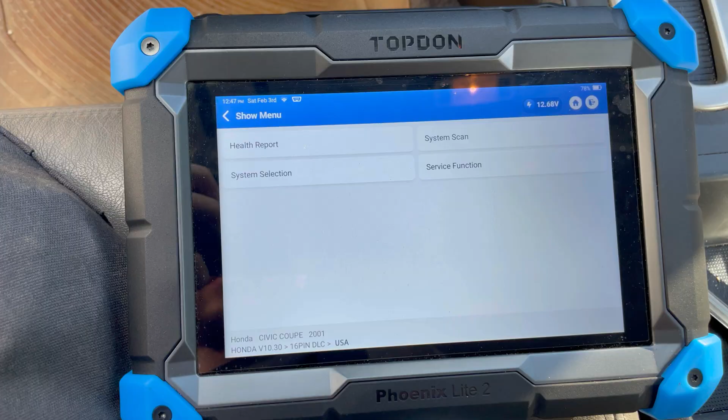I'm using Topdon Phoenix Lite 2 today. I purchased this a few months ago and I've been playing around with it and I seem to like it a lot. I really like this tool. I bought it with the LabScope kit. Really love it. It is what it is. You know, it's not like the biggest screen or whatever. It doesn't have the topology like everyone raves about, but what do you need topology for? I don't need it.

Anyways, we'll let this query all the modules. I think it takes about 2 minutes on this slow Honda, and we'll see what we've got. We've got our 3 codes. I already knew about that because I've already looked at this, but I'll show you what we had for codes.

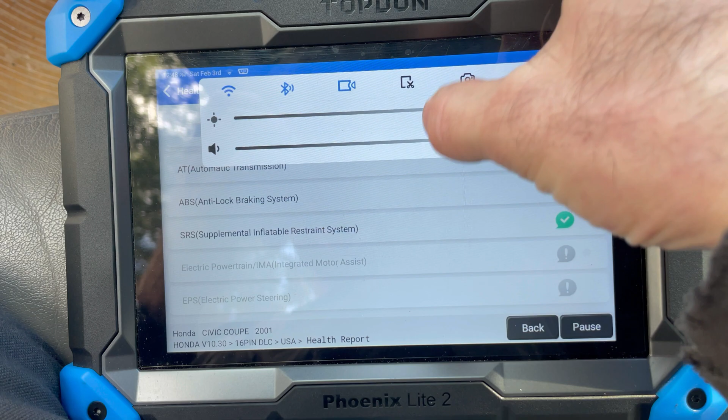Another thing is that this tool has screen recording, which I may start incorporating into my videos. Yeah, I could just do a screen recording. But that sounds like some extra work for me and not a whole lot of, what did we gain from it? You can still see the screen. So yeah, it's taking a little bit of time, but it's scanning for a lot of modules that this old 2001 vehicle will not have. But that just kind of shows you what kind of capabilities you have on this tool, that it will communicate with all these different systems.

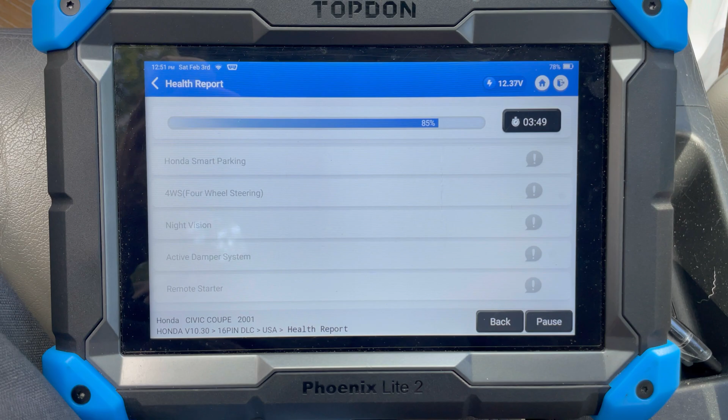And I'll show you, because I have my other tool, the King Bolen. I have this one that the stranger from the internet sent me for free, and I've been comparing. And I'll show you a couple of the differences between these two tools, even though they are pretty similar in software. They basically use the same software.

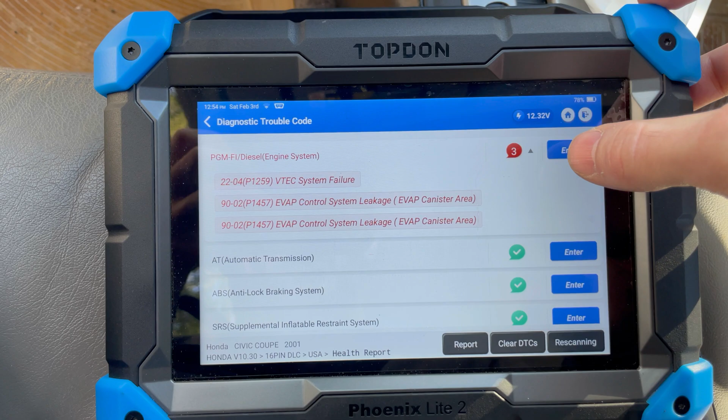So this is what I ended up with for codes. We've got a VTEC system failure code and the P1457 EVAP leakage code, canister area. I already did some testing on the VTEC system. I will do it again because I told the customer, hey, I couldn't duplicate the VTEC fault. So we will go for another road test and maybe I'll try out that screen recording thing, right? And we will test the VTEC system, and I'll show you how I test the VTEC system.

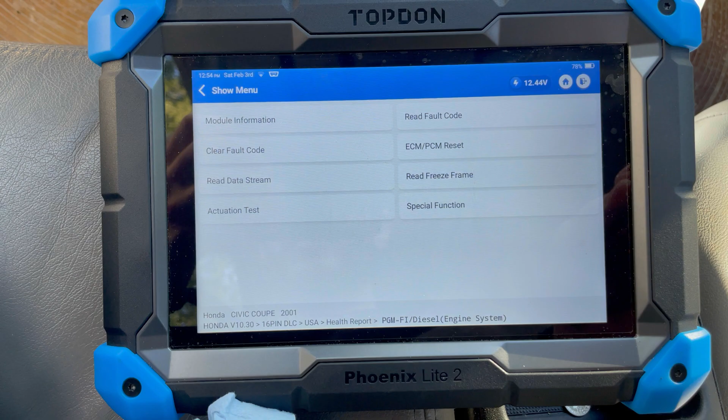I don't think that there's really anything further that I can do with the scan tool because the scan tool will let me operate the 3 EVAP valves, but it won't let me do it with the engine running, because what I wanted was the engine to be running so I could operate the purge valve and test the vacuum coming out of it. So let me go under the hood and I'll show you how I ended up where I ended up.

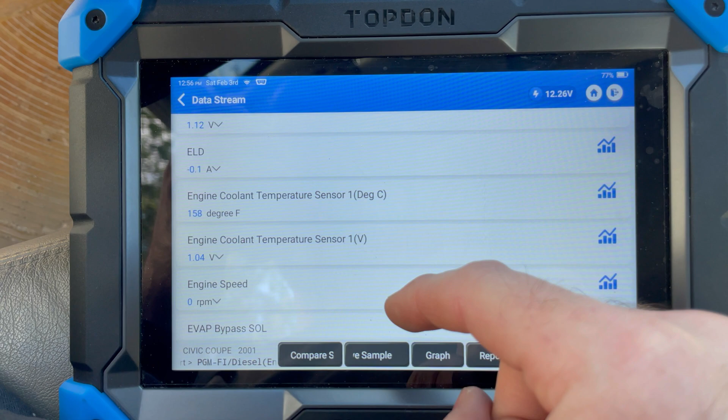So the first thing that I do when I am testing an EVAP system is I will look at the fuel tank pressure sensor as well as other pressure sensors on the vehicle to verify that I can actually trust them, because the fuel tank pressure sensor is a huge part of the EVAP system. If that sensor is not reading correctly, well, your EVAP system tests are all going to be wrong.

0.23 psi, I'm okay with that because 0.2 psi is not very much. But what I think I'll do is I'll open up the gas cap and make sure that that goes a little bit closer to 0. I already did all this, so I'm already happy with the fuel tank pressure sensor operation. Again, what I found was that during the EVAP system self-test, because I can command a self-test with this tool, it takes a little while and it doesn't really do much for me. Where is it? Special function or actuation test.

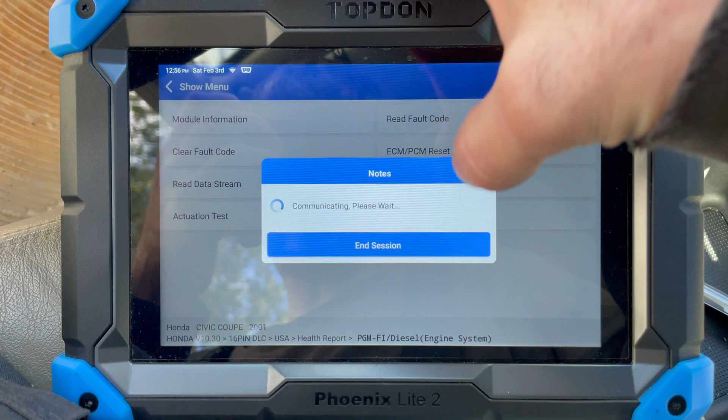Anyways, so during this test, I noticed that the fuel. So that just shows you what this tool can do. And I'll show you the King Bolen, the difference, because this is a fully functional professional grade tool. This has bidirectional controls. I can send commands out to the car with this tool.

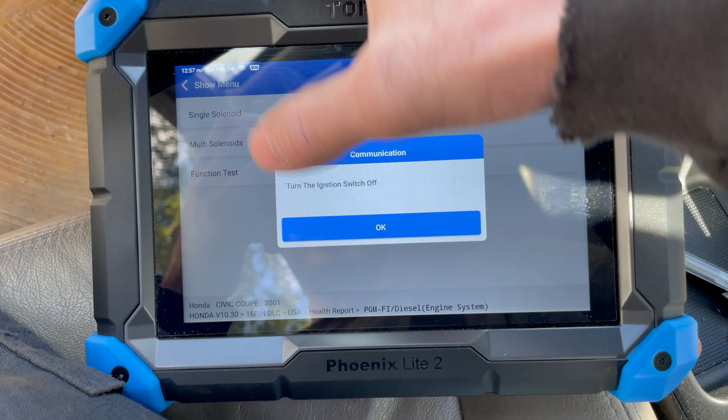Function test. Yep. Ignition off. Good old Honda beep. Start the engine.

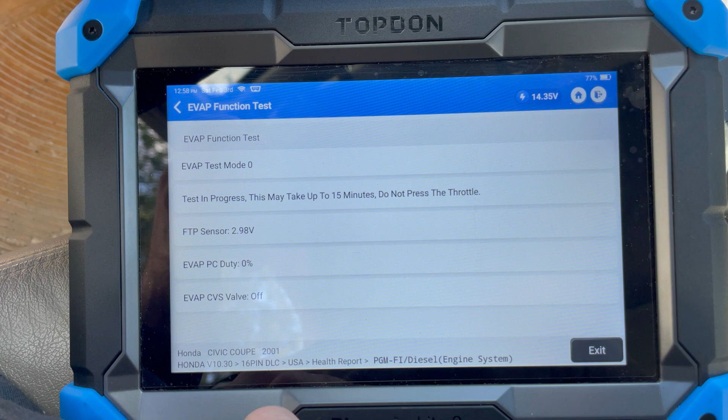So anyways, I went into this EVAP system test. I let it run and complete. And then, so we've got our fuel tank pressure sensor voltage. It does not show us pressure anymore. I can't remember where I looked it up, but it tells me the fuel tank pressure sensor voltage value, which is normal. But the important part is when we see these valves get commanded on and off, and we see the purge come up.

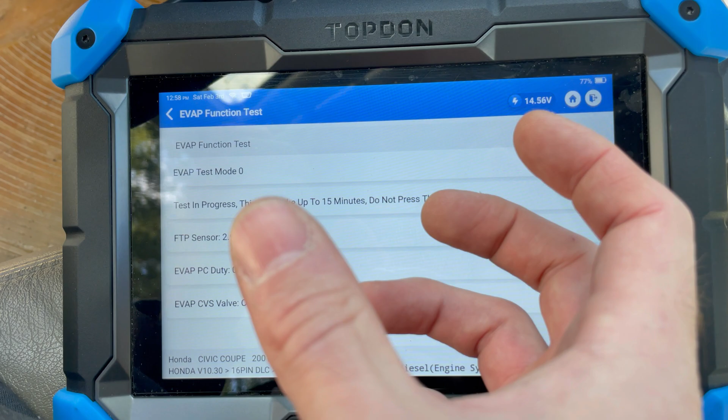So let's say the vent valve, canister vent shut solenoid is on, meaning the valve is shut and sealed, and the purge solenoid starts coming up. So we've essentially closed off the system and started to pull a vacuum. When you see these two values move, you should see the fuel tank pressure sensor do something. I don't care what the value is, if it's good or bad. When we are drawing a vacuum or pressure of any sort on that fuel tank, that sensor should move.

Okay, so that's where I decided I need to look at that purge valve, because I saw that the fuel tank pressure sensor just sits there and does nothing. Doesn't matter what happens, nothing moves. So of course it sets the EVAP code, because it's not pulling any vacuum on the system, and the computer can see that.

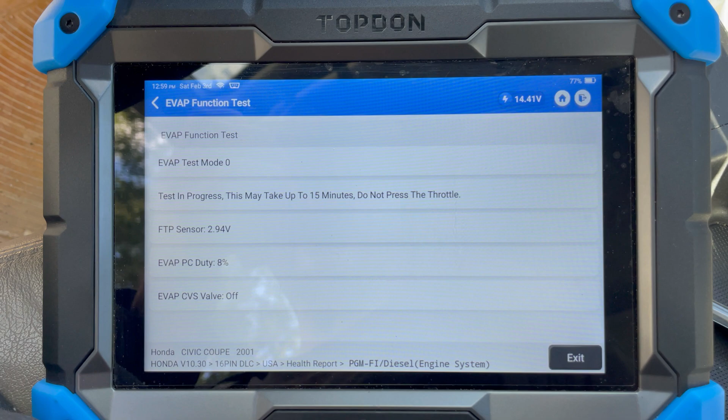So this EVAP self-test will actually run for another probably 5 or 10 minutes, and then it's going to pop up. It'll say rev up the engine to 3,800 RPM for 10 minutes or something crazy like that. I've already gone through all this process, and I've determined it's that purge valve. You're not seeing anything really change. Even though the vent's not closed yet, you should see something happening.

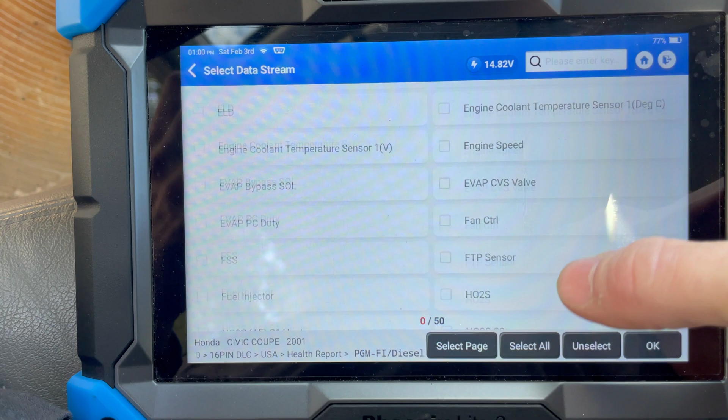Anyways, let's go under the hood. I'll show you how I further confirmed that I needed to look at that purge valve. So we'll go back to data, EVAP purge control duty cycle. So we're going to verify that the computer is actually commanding it to do something before we go check it, right? So now let's go under the hood with this tool.

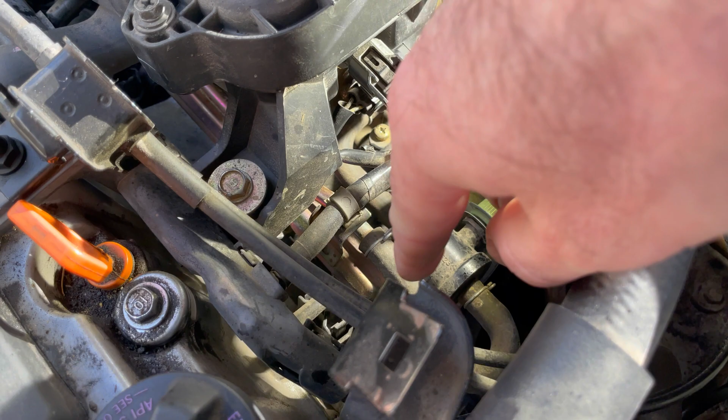Okay, so here we are under the hood. We still see that the purge control is at least commanded to do something. The purge solenoid is that guy right there. So this hose right there goes to the engine. That's where your vacuum source is. When the valve opens and closes, it applies vacuum on this hose. There's your EVAP test port.

It applies vacuum on this hose, which runs through this pipe to the other side, and it runs to this vapor line right here. So this vapor line goes to your fuel tank, and that's your EVAP system. So from here back to the purge valve, you should have a vacuum. Whenever this guy's commanded to almost 30% duty cycle right now, we should have a vacuum. So when I disconnect this hose, nothing, no vacuum. So that tells me right away my problem, or at least my starting point, is to diagnose the EVAP purge solenoid.

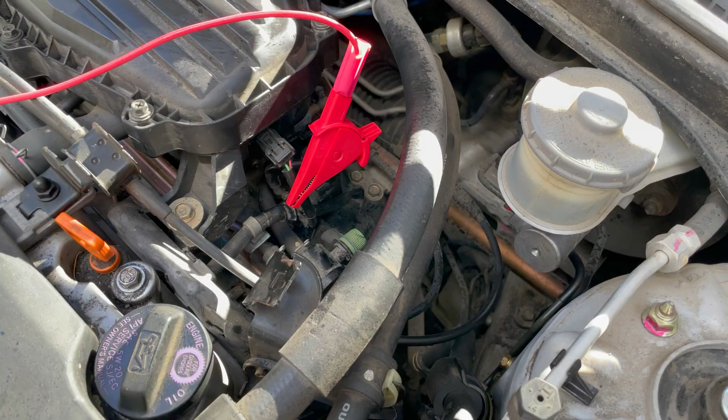So I took the purge control solenoid and I took the two screws out. I back probed on the, I can't remember which color wire it is, blue and yellow I think. That's the ground from the ECM to ground that solenoid and actually operate it. And I've got this running over to the scope here. Nothing's going on at the moment. We're sitting here high at battery voltage essentially, and what you're seeing there is voltage spikes from the ignition coils, so ignore those.

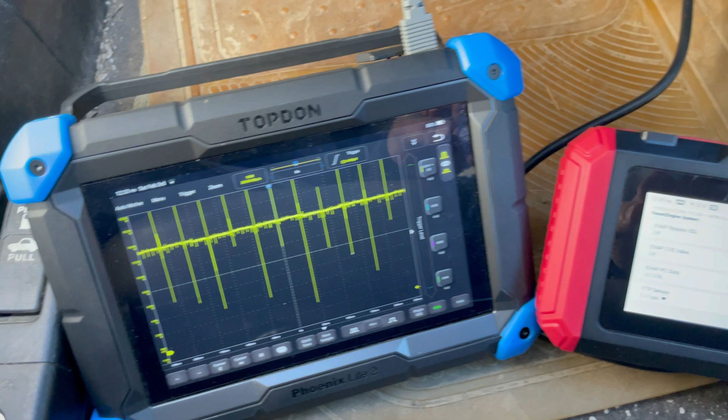Let's go look at the scan tool and see what our actual duty cycle is being commanded to, and let's see if this actually looks correct or not. All right, I brought everything in the car with me so we could see. Again, those voltage spikes are just from the ignition coils. On the King Bolen, I've got an EVAP purge control solenoid duty cycle of almost 30%, which we are not seeing here. We should see a 30% duty cycle ground signal. It should be pulling all the way down here.

This is 0 volts, so this is your ground down here. That tells us that these voltage spikes are not what we're looking for. We should see a nice square wave all the way to ground, all the way back to battery voltage in a 30% duty cycle. So do you know what that tells me? It means we probably have some sort of broken wire between the purge valve and the engine control module.

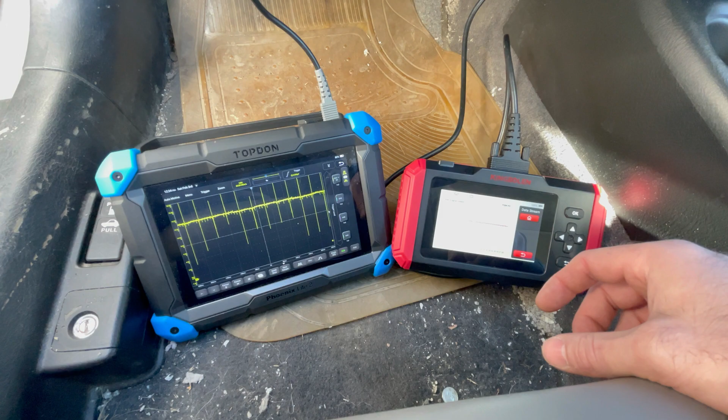So I think I'm going to look up where's the engine control module. If I remember correctly, on these Hondas, it's underneath the passenger seat there. So I may have to open up, pull the carpet back and get a pinout and figure out which terminals that we're looking for, and we'll do a continuity test to make sure that that is what is going on. I could explain on the wiring schematic how I'm hooked up and make that make a little more sense for you too.

So here on the wiring schematic, we've got the ECM here, we've got our fused power up here, we've got our purge solenoid right there. Okay, so on the black and yellow, anytime the key is on or in start, we should have power at all times, okay? And on this wire, the ECM will pulse ground. It'll duty cycle ground to either control that valve a little bit open or all the way open, right? It's gonna flow more or not, okay? So I have my probe connected on pin 2 directly at the EVAP purge valve.

So if let's say that this wire is not being grounded, you could just imagine that as the valve is closed so the water does not flow through the pipes. But since the valve is closed down here, any voltage or pressure will be, you'll have that potential all the way up to the point that it is open, or that open circuit, I mean. If we were talking in water terminology, water and pipes and valves and stuff, you would have a little valve there. You'd essentially have pressure all the way up to this point.

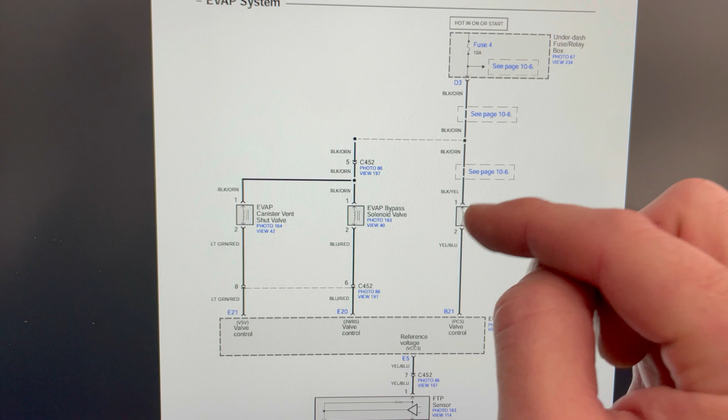So I plugged in right at that point right there, and I do have a full 12 volts. So that proves that this fuse is okay, this wiring is okay, and I'm getting at least power up to and through that solenoid. So the solenoid's probably okay also. But we are not seeing any ground signal from the ECM. So I need to access the ECM. I'll access this connector here, and I will test from here to here and verify whether this wire is our problem or not. So I think that this wire is probably open somewhere, broken wire, crusty wire, whatever we're gonna find.

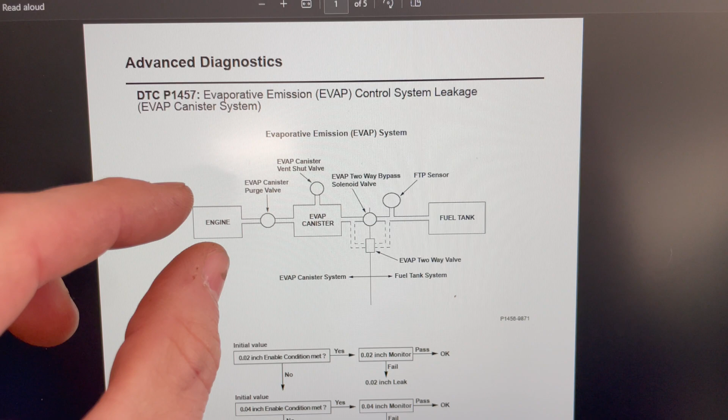Here's a quick diagram of the system related to that P1457 code. We've got our engine, which would be our manifold vacuum source. That's the source of vacuum to suck the fuel vapors rather than liquid fuel, because we're just trying to control the vapors, evaporative emissions, right? So that's sort of our vacuum source. The purge valve is our valve that can turn on or off, or a purge duty cycle anywhere from 0 to 100%. So that controls how much vacuum is going to be placed on the EVAP system and how much vapor we're pulling in.

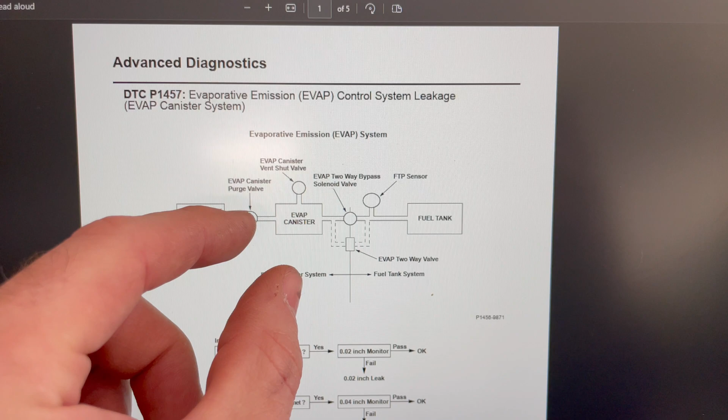The canister vent valve, this should be normally open at all times, and the only time that we close that valve is when we are trying to do a leak test of the system. So when the computer decides it wants to do a self-test on the system, it will close that vent valve, which will essentially cause the entire fuel tank and system to be a closed container. We're gonna pull a vacuum on it with this valve, a controlled amount, fuel tank pressure sensor right here to measure how much vacuum we've actually pulled. And the result is gonna be whether it holds the vacuum or it doesn't. So it's gonna tell you, well, just how fast did the vacuum leak down? Was it a small leak or a large leak?

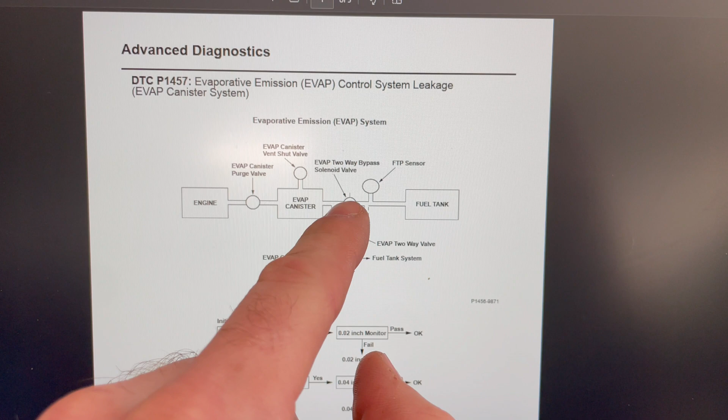So what we're chasing here is a P1457, which means we've got a leak on the canister side of the system. We've got the two-way bypass valve also. That's a little something that Honda does so that they can really fine tune on where is that leak, right? Because what they're doing is that they're changing the state of that valve, the two-way valve, to either leak test the canister side or the fuel tank side, and they can get a better idea of where exactly the leak is.

It's not really that, you know, I wouldn't say it's needed that much. Standard EVAP diagnostics without that little valve, you can basically test the entire system the same way. This is just a little bonus that Honda is doing.

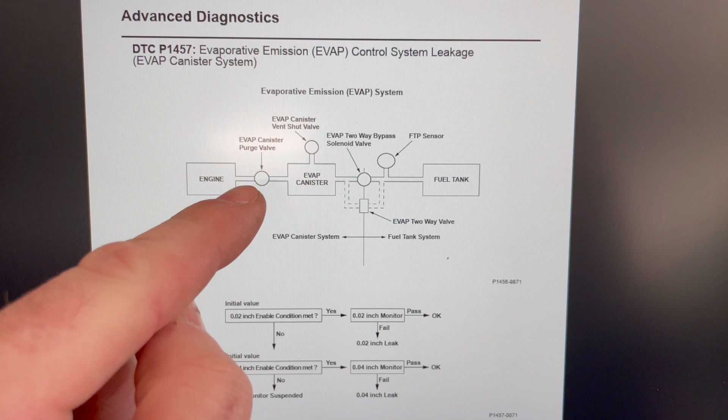So what we have going on here is that the purge valve is showing duty cycle. It's showing that it's commanded to about 30% or 40% at some times, and I have zero vacuum. I have no vacuum getting out of that purge valve to the rest of the system. Therefore, the ECM flags that as a large leak. It says this system is leaking so bad we can't even build vacuum.

But the ECM doesn't know that the purge valve is simply failing to send any vacuum to the system at all. And our testing has revealed that we probably have some sort of electrical fault with the purge valve circuits. So let's continue.

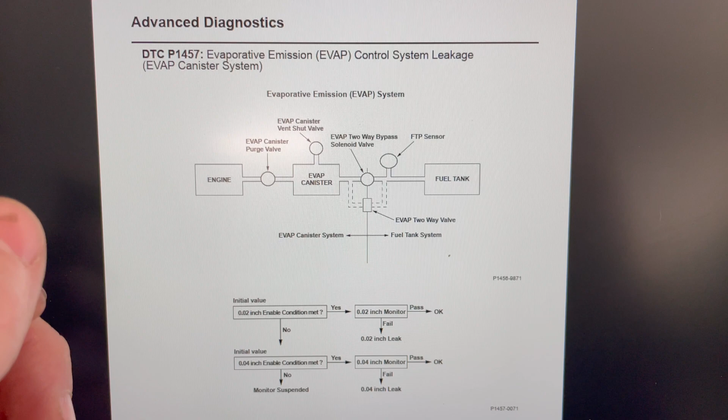So I took a little break and I did some research. Yeah, the PCM, the ECM is underneath the dash. It's not underneath the carpet, it doesn't look like. But I don't really want to crawl underneath the dash if I don't have to, so I decided, well, is there an easier way to just do a quick test?

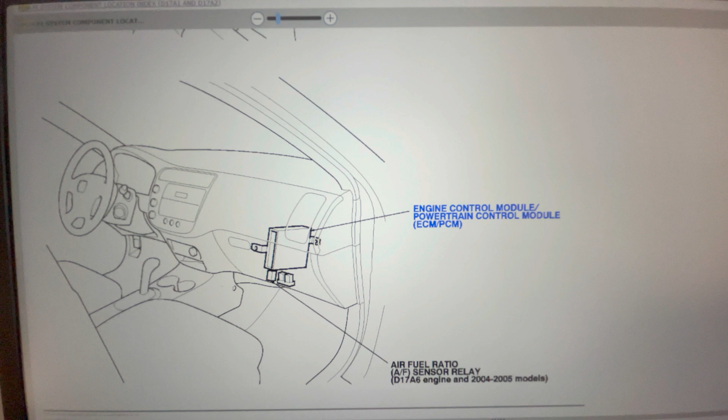And I decided maybe I should use the scan tool to command the purge valve on and use a test light just to see if it lights up and just verify that, yes, I do need to go under the dash. So back at the car, what does that look like? I'll grab this scanner.

There. The test light that I had wasn't working, and whenever I tried to touch the bulb and see why it wasn't working, well, the bulb crumbled to pieces, and that was that. So I did find this, and we're gonna see if this works. Got our valve here. We're gonna back probe on the correct wire, but I'm gonna disconnect the solenoid when I do it, and we're gonna see if that wiring will hold any load.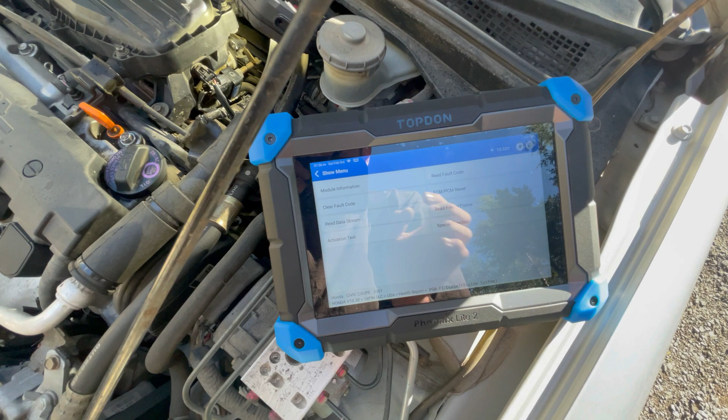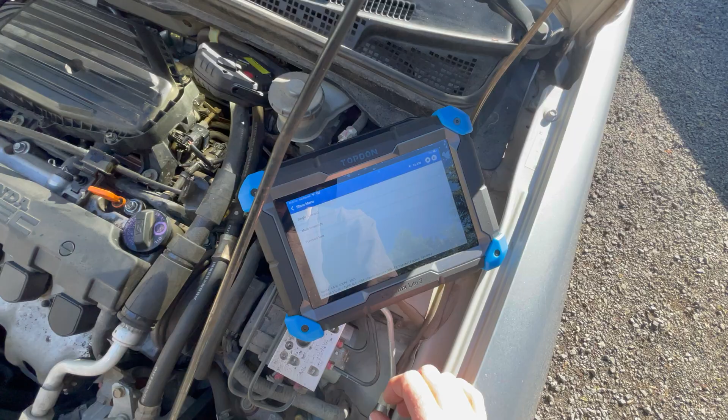So, nope, data, we don't want data. Activation. Single solenoid. Does not want the engine running. Function not supported. Okay, did I not turn the key on? Let's try that again. Like magic.

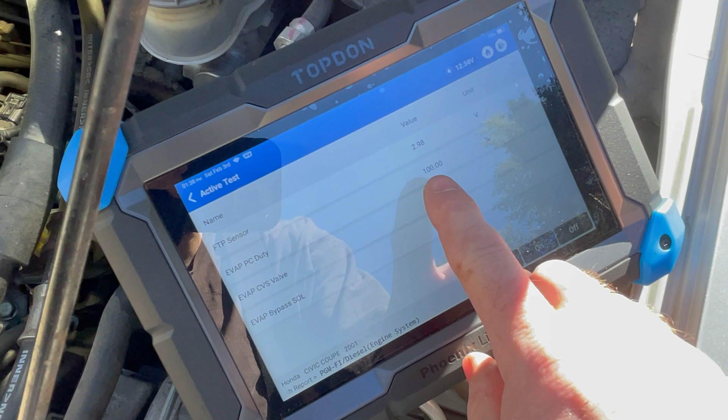Okay, so purge solenoid duty cycle 0%. It's commanded off. If I click on, it commands it to 100% duty cycle, so the test light should light bright at that point. So let's verify that we can trust our test light.

I don't think I have enough hands for this because this little piece of crap light that I found doesn't have alligator clips on it. I'll do what I can. Look at that, at least one of them's working. Okay, so we are testing for a ground. Stick this over here, and I'll go get whatever back probe I was using earlier. Okay, so I've got my stuff rigged up here. No joke.

On, let's say 100% duty cycle. I'm using a T-pin. I'm not actually at the shop today. Look at that, it's not lighting. That should be lighting up right now with a ground. We've got no ground to the purge valve.

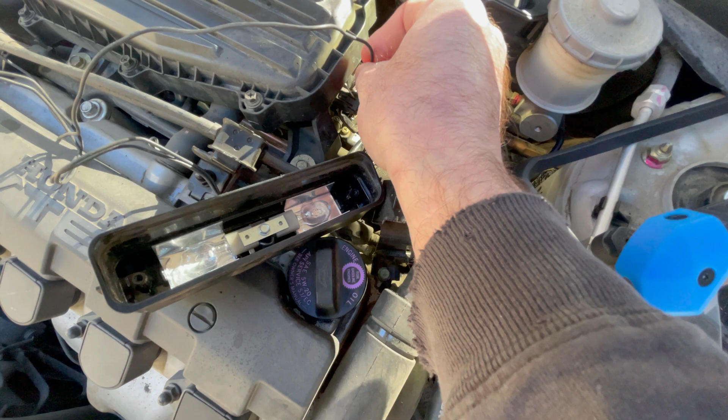That verifies, look, it's commanded to 100%. Not lighting the light, yet the light works. So that verifies that we need to go under the dash and check the wiring between the purge valve and the ECM.

Okay, so after lowering the glove box, I can see the ECM up in there now. Just need to figure out which connector it is and which terminal. Look at that. We've got some sort of aftermarket wiring hacked in. Could that be related? Did somebody hack some wiring? Did they cut a wire somewhere that they shouldn't have? Or what? What's going on here? Okay.

Anyways, we're going to test the continuity of the wire and verify whether the wire is open or not. If the wiring is okay, then we can assume that the ECM may be having a problem grounding the purge valve, so the ECM may be faulty.

Okay, back on the schematic, apparently B21. Does that mean connector B, terminal 21? Does that mean row B21? We don't know. Might have to find some more information there on the pinout view. These links never work, so I have to search them out and find them. Stand by.

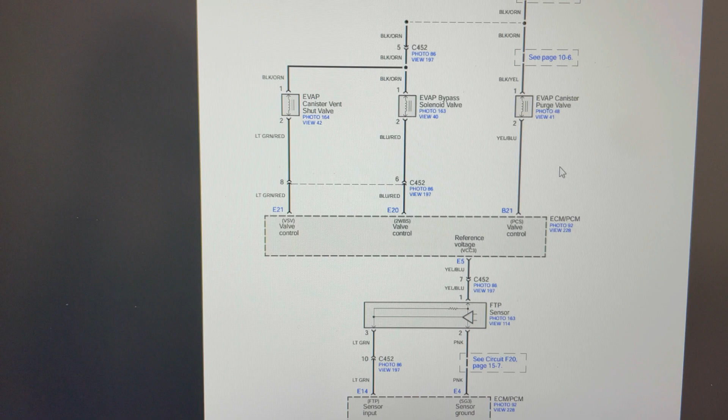Look at this, found this buried deep within. They've got terminal 21, connector B. It even gives you a descriptor of what you should see. Further down, there was even a picture of all of the ECM connectors somewhere. Okay, there it is right there.

This is the pinout for the ECM, A, B, C, and E. So we are after the connector B, 24 pin, and we're after terminal 21 to do that continuity test on the wiring.

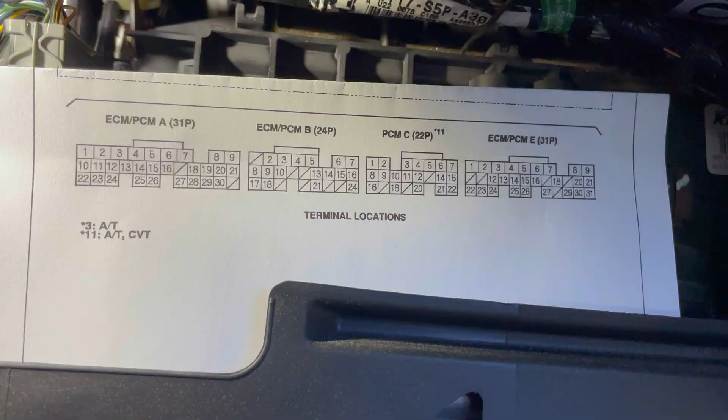I've got my guides printed out here. I've got my pictures of my ECM connectors. I've got my wiring schematic. Now I can go back under the dash and continue testing. So if I go by this picture here, I've got a 31 pin and a 31 pin on each end. The one we are after is a 24 pin, and we've also got a 22 pin. So we're gonna have the larger of the two in the middle.

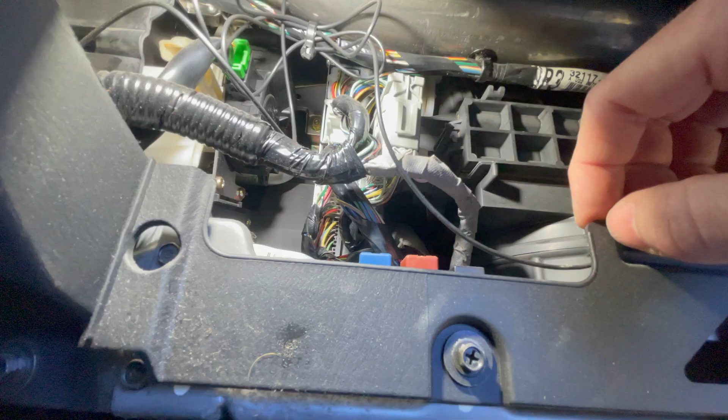Where does that translate to the car? That black one looks like the small one, so it's that white connector. I'm not going to disconnect it if I can help it. I'm going to back probe it because I don't really want to start disconnecting things. I don't want to disconnect the radio, deal with stuff like that if I don't have to. We're going to back probe that and do a continuity test on the wiring. So let me see if I can kind of get this stuff out of the way.

Where's my little schematic? Terminal 21 is at the bottom of the connector all by itself. See that? There's a blank terminal, two blank terminals, and one on the end. We are after what? A yellow and blue wire all by itself on that white connector. So, zoom in. I can see better in the camera than I can see just by my eyes. It's right there. Is it? Is that it? That yellow and blue one.

Right there. Can't get in there. I've got to get back probed on that one. And then we're going to do a continuity test to the purge valve. See if we can verify our wiring fault and then what to do about it.

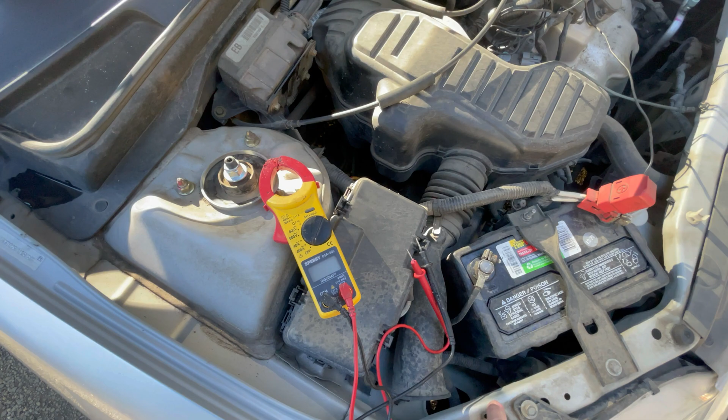So I'm going to be using this meter today. It's more of a household electrician's meter. Of course the battery's dead. Gotta go find a battery, and the dog's chewed on it. Isn't that nice? I don't have my Fluke meter with me today, so I'm gonna be using this for the continuity test. I've compared it to the Fluke and I trust it, so we're good there. I just need to go find some batteries. I don't think the leads are long enough on this to reach all the way, maybe, but we'll see. I'm using the back of my truck as a workbench today. Just went and robbed some batteries out of somebody's remote. I'm gonna throw these back on the meter and continue on.

And if you keep hearing airplanes, it's because there's at least one, I think 2 or 3 of them flying around doing aerobatics right now.

Okay, so back at it. Always verify that your tools are working properly. Yep, the continuity tester is working okay. Let me set us up on the purge solenoid over here and the ECM in there. I may need a jumper lead to reach all the way.

Let me see if I can catch these airplanes on video, maybe. We'll see. Yep, there it is. They were doing loops and flips and all sorts of stuff.

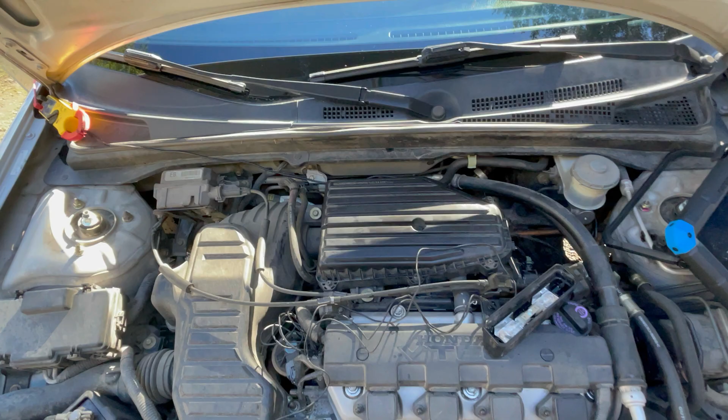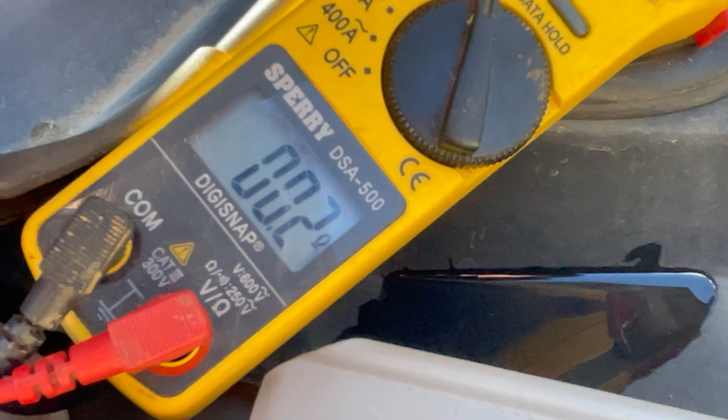Okay, so I've got the black lead connected to the yellow and blue wire on the purge solenoid connector, and I've got it stretched over here with the meter sitting here, and the cord reaches in there. What this means is that I don't need to rig up some test leads with alligator clips to reach all the way. We'll just listen for the beep, right? I don't know, we may need to see the value. Well, look at that. 0.2 ohms of resistance. So that wire is not broken. It's not open circuit. Could it be green and crusty and not making it all the way? Should we do a voltage drop test on it?

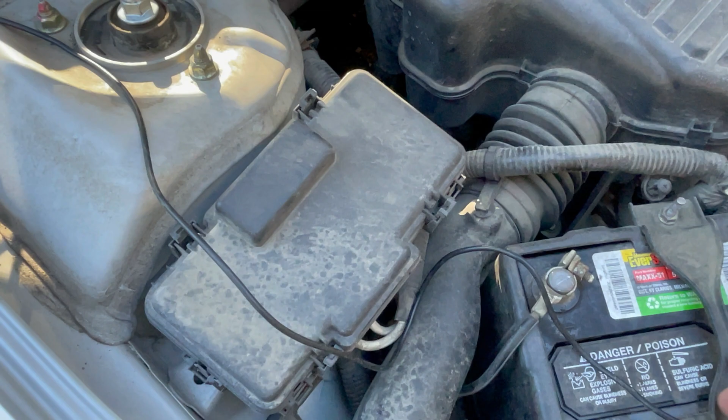Okay, so now look. I've got the red probe connected on the yellow and blue wire, terminal 21 of connector B. We're running it out here. I've got it connected to this lead. So I'm essentially taking the place of the ECM grounding the system right now. I've got my test light connected to the purge solenoid, the yellow and blue wire. So that's basically the other end. And we are going to simulate the ECM grounding that wire. So that tells us that the wiring is okay.

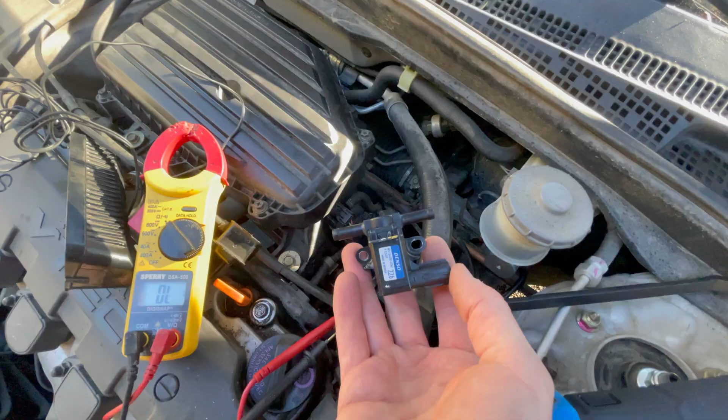Do we have a faulty ECM? How could it have failed? Could it be a bad purge solenoid killed the ECM? That's probably the only way that that could happen, unless somebody was in here testing and they blew it up. You never know. So I removed the purge solenoid so I can do a resistance check on it, and we'll determine if it's shorted. If it's shorted, then we would know why the ECM driver had failed.

Man, I need to get a camera mount. But let me see if I can rig this in here.

See that? There's two of them. Told you. They're doing aerobatics. They do loops. Wherever they're doing it though, it's like right behind the trees, so I can't get a shot of it.

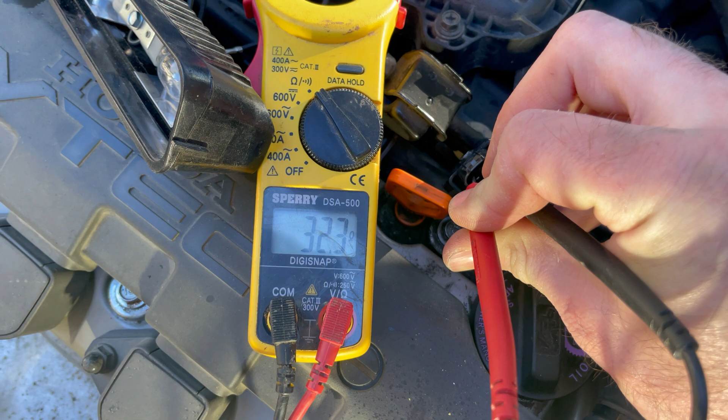So I just had it touching both terminals. There we go. About 33 ohms, 32 to 33 ohms. That is not shorted. That's not a shorted solenoid. That would not blow out the driver in the ECM. Of course, if this was supposed to have a clamping diode inside of it that was bad, that could blow out the ECM. So this is kind of a hard sell.

It's looking like a faulty ECM. No doubt that's going to be expensive. Do I even have the equipment to replace and program a Honda ECM? I don't think I do, and if I do, I'll have to do the research and verify that. I would replace this and the ECM because I don't trust that this wouldn't blow it up, right? So I'll have to do my research on this.

So now that I've verified the wiring is okay, I can reassemble all this, put all this stuff back together, and go. I have to do some sit down time and see what it's going to take to replace this ECM and see what it's going to take to get it programmed and all that good stuff. But let's go take a break real quick. So I'm gonna take a quick breath of fresh air.

You hear all those frogs? Yeah, ambiance, ambient noise. That's why I don't have any music in my videos. Music's annoying. It covers up all the details. Covers up all the cool stuff you guys wanted to hear. Or maybe that's just me. Whatever. All right, we can get back to work now.

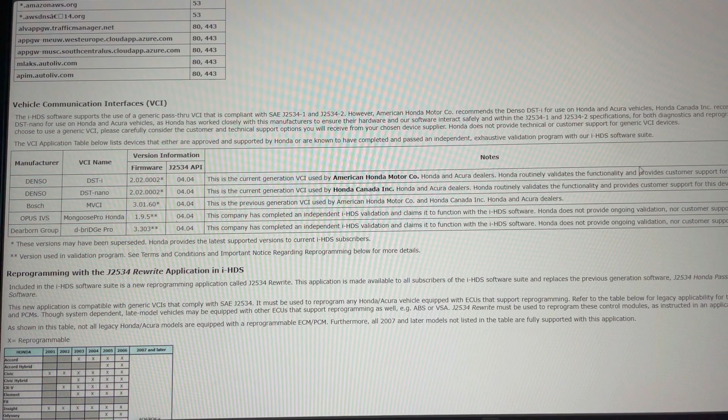Okay, back here in research mode. Honda programming, Honda J2534. Where did I see that? Vehicle communication interfaces. That is the list of approved devices that they know will work. The MongoosePro Honda, that may be an option to look into. I used to have access to a Bosch MVCI. Those work pretty okay. I don't have one anymore.

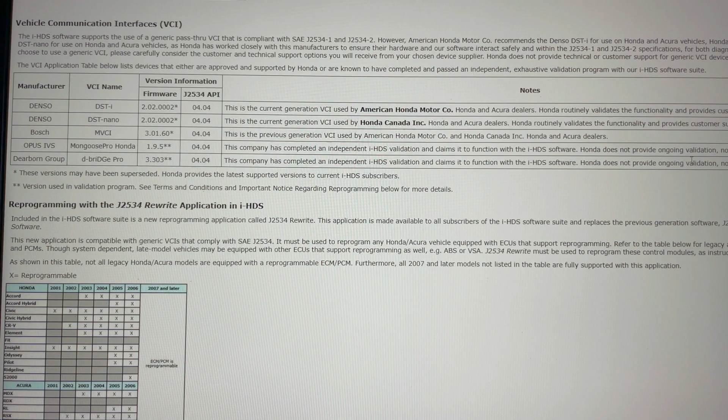So at the moment, I don't have the equipment to properly program this Honda if I were to replace the ECM. So I may have to send this customer back to the dealer, and I wonder what they're gonna say. They're gonna dispute what I had to say, I bet. That's just how it goes when you get two shops or two technicians whose diagnostics contradict. You never know.

There we have it, the Mongoose cable, about $500 plus, and I don't really do enough Hondas or Honda programming to really justify it, so I think I'm going to tell him to go back to the dealer and have them replace the ECM.

So back onto the VTEC thing, we had a VTEC performance code. That right there is the VTEC solenoid and the VTEC oil pressure sensor, or the switch. So when the solenoid turns on, it sends oil pressure to the camshaft and it alters the valve lift. And the pressure switch changes state to verify to the ECM that that has indeed happened.

So it's a verification check. When that code sets, basically, the ECM has commanded it on and the switch did not change state, or the switch is in the wrong state when it shouldn't be. So we're gonna go take a drive, or possibly, I think I did see in the scan tool menu it said VTEC test. Let's try that. Back here in the car, we do have a VTEC test.

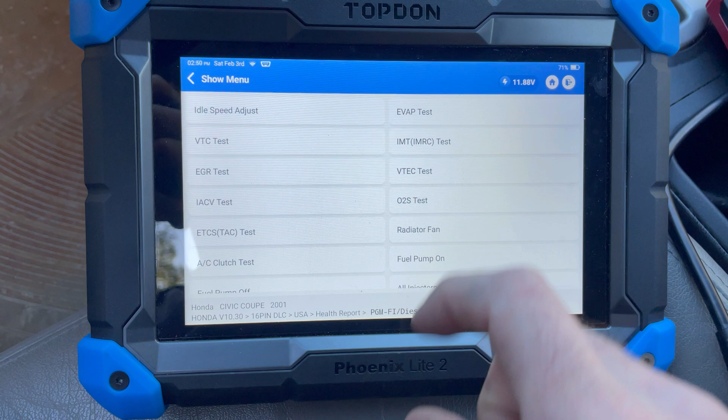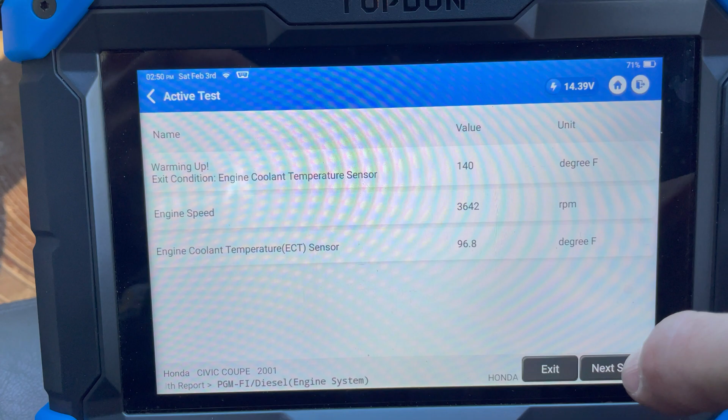Keep the engine speed above 3,000 RPM. Okay. We have to be at a minimum temperature of 140 degrees to run this test. Stand by. Okay, well, we reached that minimum and then it changed the screen on me. Okay, I have to click OK.

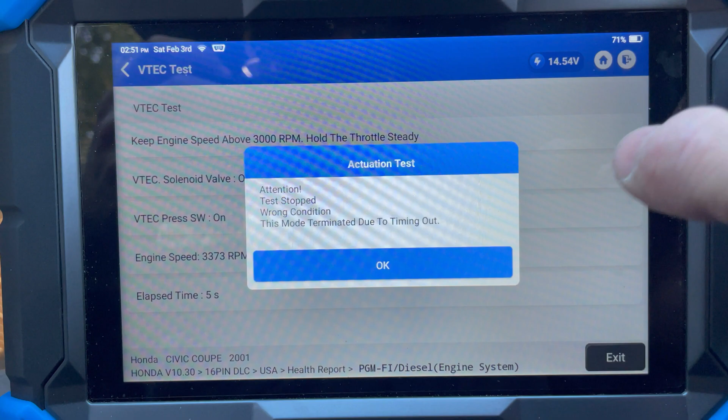No, technical difficulties. That's why I usually don't prefer to use an intrusive test like this, because you run into stuff like this and it just wastes your time. It told me to release the throttle, but I wonder if that was incorrect. Should I just lie and say I did? Elapsed time, now it's doing something.

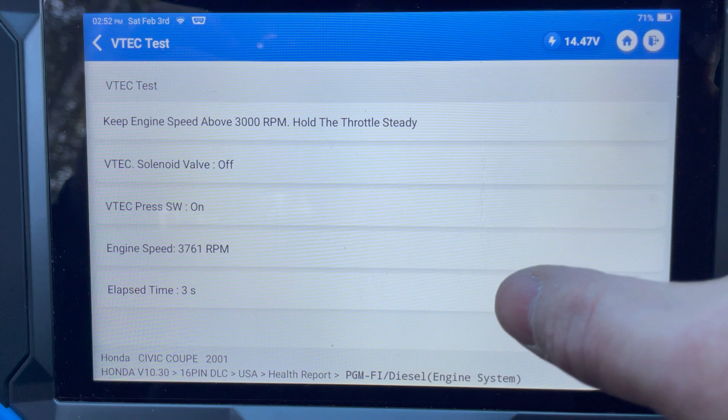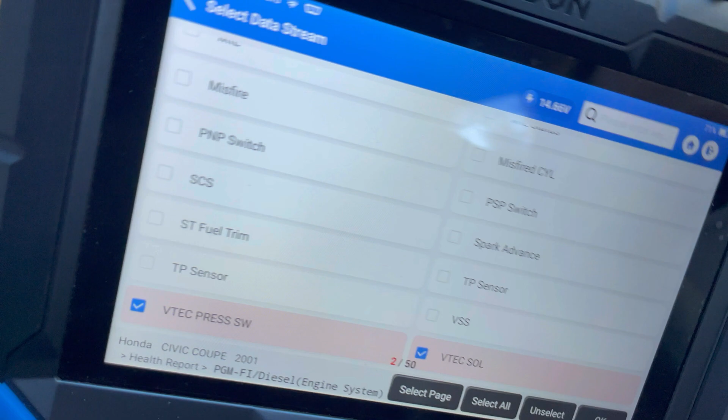I don't know if I trust this test at all. I don't. Let's go back. Read data stream. Whoops. Data stream. VTEC. Okay, VTEC solenoid, VTEC pressure switch. Let's hit OK. And graph. Okay, so, oh, we could even do a combine.

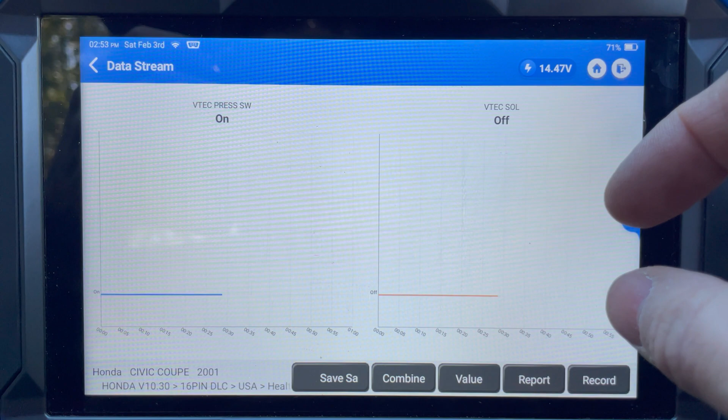So the VTEC system's only going to operate above 3,000 RPM, and apparently only when you're under load. So we are going to have to drive this to just test it in its natural state, letting the ECM make its commands on its own. And that's what I did before. Like I said in the beginning of this video, I did already look at this vehicle about a week ago when I had a little bit of time.

I took a look at it, drove it, and I said, well, the VTEC system isn't really having a problem right now. You would, of course, want to check the engine oil level first, and I did, and it was not at the minimum, but it also wasn't full, so it was kind of half full. And oil level can have an effect on your VTEC system, so you never know. It could just be low oil level, and that's it. So I'll have to move some cars around here, and we'll have to take this for a quick run.

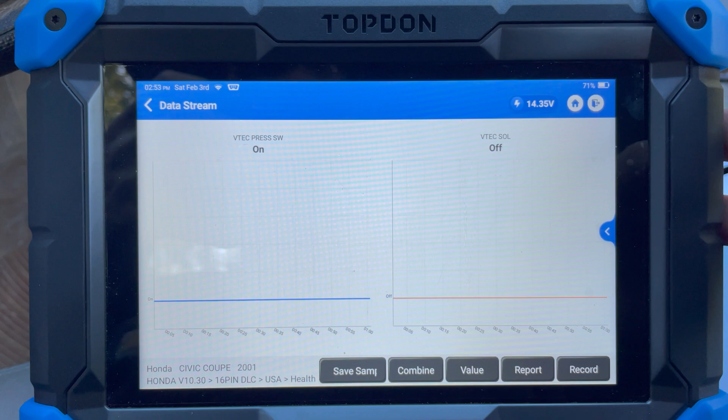So I've got Mrs. Dad's Garage driving right now. Let me see if I can try that screen recording feature. Starting recording. Okay, so this is normal driving right now. The VTEC system has not been activated. Step on it real quick, please. You see how that VTEC solenoid was commanded on, and then the VTEC pressure switch responded, and then when we turned off, again, the pressure switch responded.

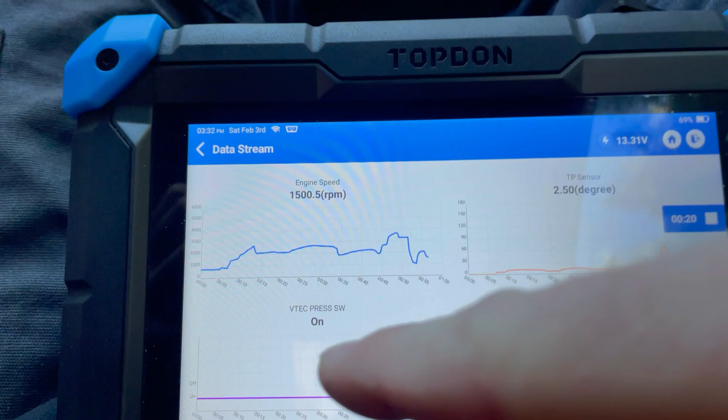Right now we're going down a hill, so we're not going to have any engine load. We're going to basically repeat this test. I'm going to have her step on it over and over again, and we're going to make sure that that pressure switch changes state every time that the VTEC solenoid activates. And then if we find any faults, great. But if not, then we'll do a combined graph and put the pressure switch on top of the solenoid so that we can check the timing. We can see if there's any sort of delay between the time that the solenoid turns on and the switch responds. So give us a minute, stand by.

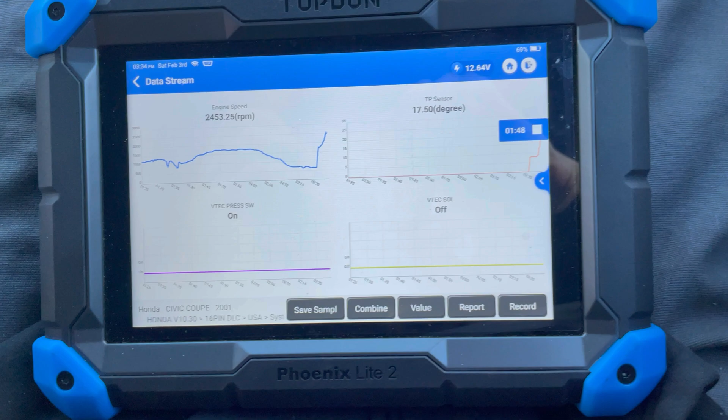Okay, so here we go again. VTEC system just activated. Let off the throttle, yep, deactivate. Get on it again. And this is what I experienced the first time that I looked at this car, is that the VTEC system was working perfectly every time. Do it a few more times. Let off. Do it again. Again, let off. See, it's changing state. We're coasting, no throttle. As you can see, I put the throttle angle on the screen.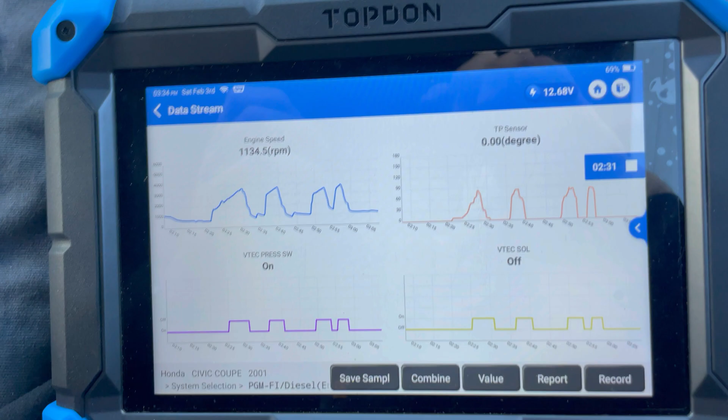Go ahead and hit it. Let off. Again. Let off. So, it looks like the VTEC system is still working okay. So I may just have to tell him that that's a code that we'll have to keep an eye on. We'll do a combined graph so that we can check the timing of everything.

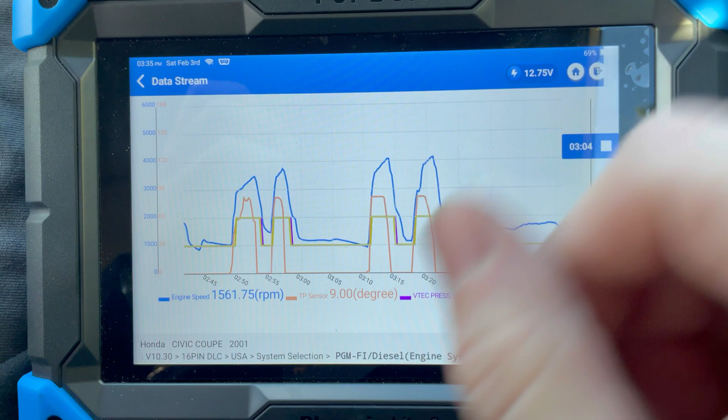Let me change this around so it's easier to see. So combine, can I just turn these ones off maybe? Yes. Okay, perfect. No, I wanted a combined graph. I wanted them on top of each other. Just those two. There we go. Okay, go ahead, hit it. So now what we're seeing, let off.

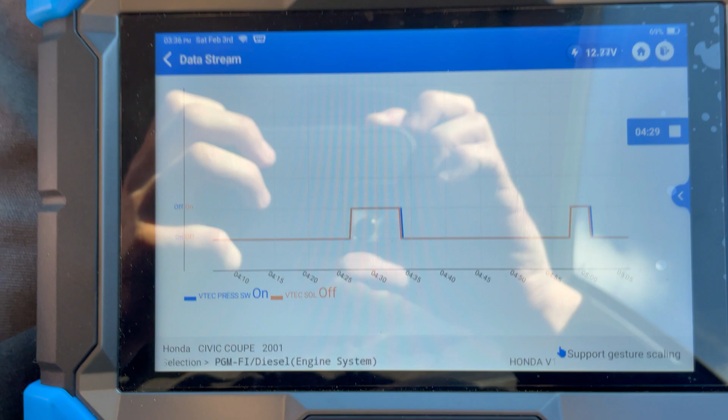The orange line is the VTEC solenoid and the blue line is the VTEC pressure switch. And it looks like the very moment that the solenoid turns on, the pressure switch is also changing state. And then again, when we release, there's a slight delay in the release, but it's almost instantaneous. Go ahead and hit it a few more times. Again, looking like the VTEC system is really working just fine. Okay, let off.

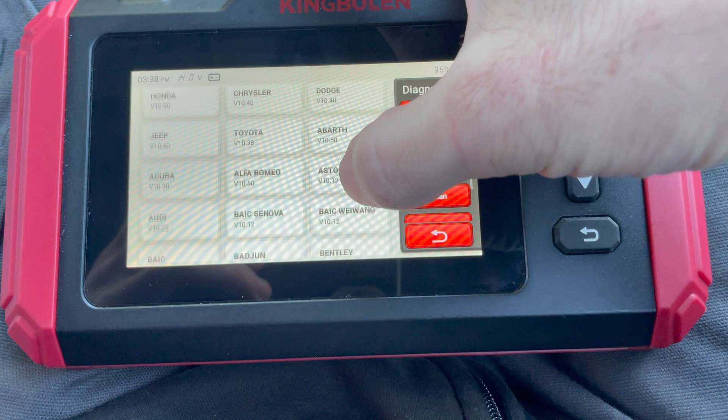Great, so this is the Phoenix Lite 2. I also brought the Kingbolen with us just so I could show you the difference in the tools. Let me hook the Kingbolen up and I'll show you what that tool looks like. At this point, the diagnostic video is done, and this is now just bonus content on the Kingbolen. Okay, so now we're going to switch over to the Kingbolen. Our diagnostic is done. I said I would show you guys a little bit of the difference between this tool and the pro grade tool. This is more like a consumer grade tool.

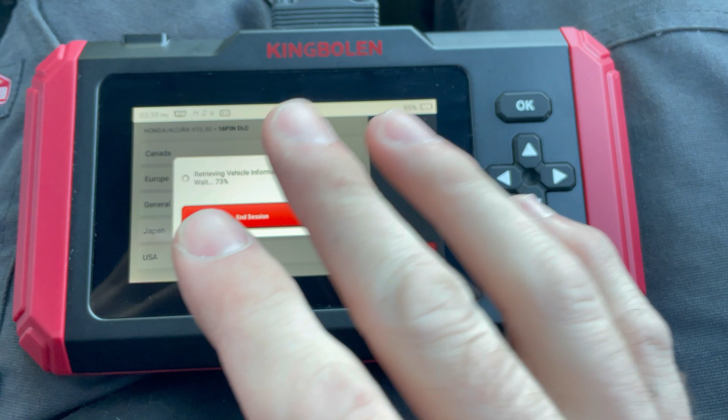I think there's only 4 systems that it's able to communicate with. It can do engine, transmission, ABS, and airbag. But this tool will not do bidirectional controls like the other one. With the Phoenix Lite, the Topdon, I can actually send a command to the car. I can tell it, I want you to run the purge valve. I want you to run this VTEC test. I want you to do the EVAP self-test. This tool will not do that. Although it looks like it's almost the exact same software. So we'll see if there's any difference in the data coverage.

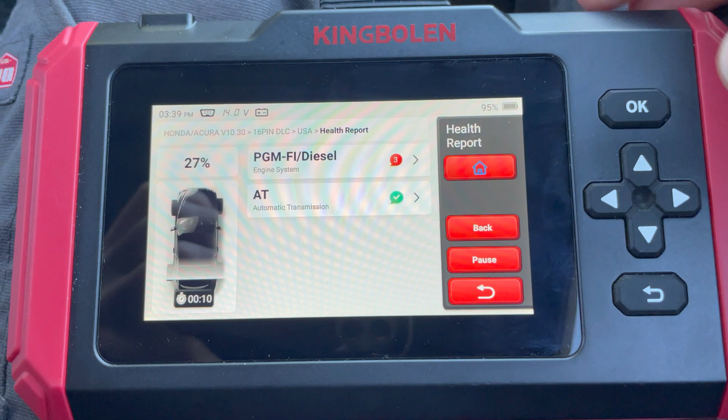So far, everything basically looks the same. Health report. Engine is not running. I think it'll still work if the engine's running. This one does the health report a lot faster than the Topdon does because it's looking for a lot less modules. It doesn't support as many. So we'll let that finish.

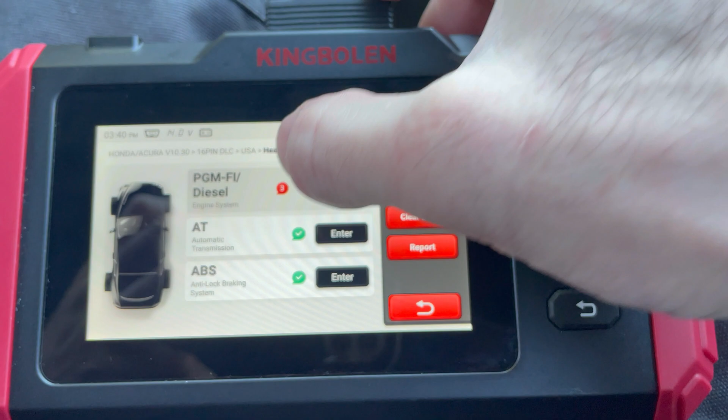Another thing is that this tool will also do the screen recording. Should it pop up on the screen? There it is right there. And I think you can just tap on that and hold it and drag it around. So we'll start a screen recording on this tool also. Again, we've got the same codes almost displayed in the same way. Enter.

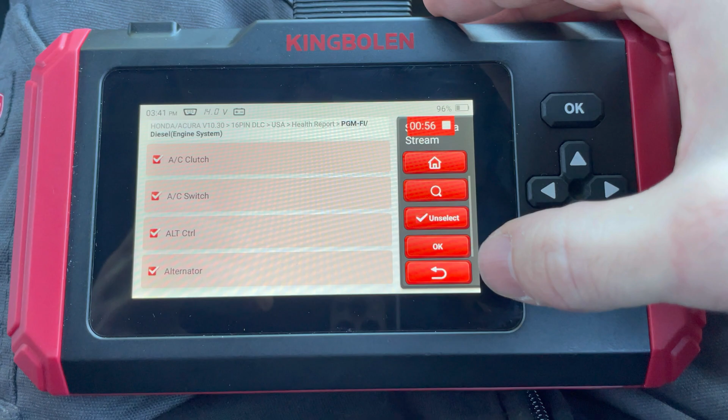As you can see, we don't have the functions menu, and we only had like 3 systems we could speak to. So that just highlights the difference in the tools. This is a consumer grade tool, but if you had the knowledge on what data you were looking at, this tool, I believe, will give us the same type of data, all of the same information that we already used on diagnosing the fault.

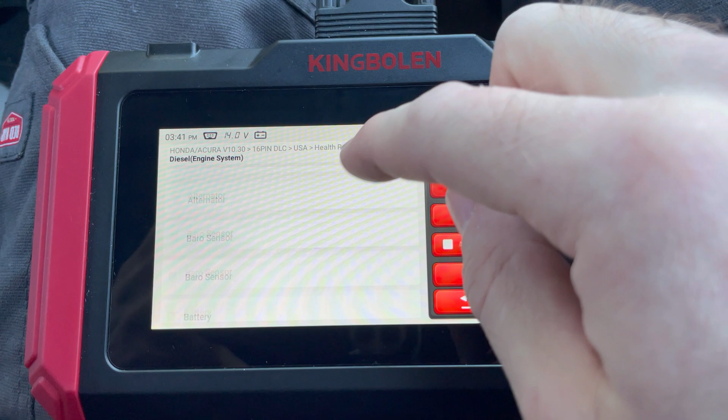EVAP. Yeah, we have the EVAP purge control duty cycle, which I used earlier. I used that value to diagnose the system and determine that the purge valve was not working. So we've got a fuel tank pressure sensor, and we also have VTEC. So let me go back and just look at the same few data points that we were looking at before. Engine speed, VTEC, throttle position, hit OK.

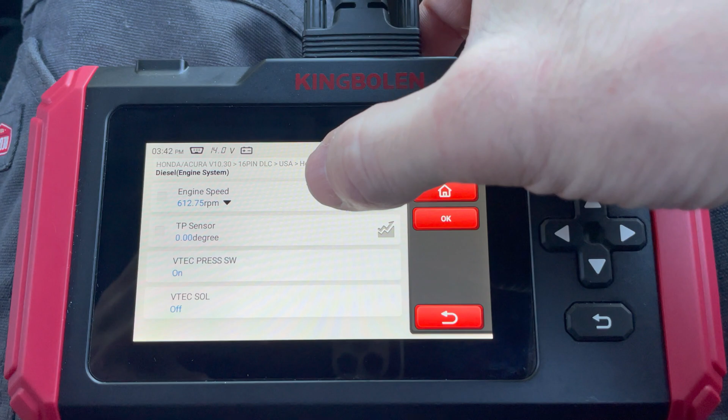And we don't have the multi-graph option like we did on the Topdon, where I could put all 4 in separate graphs, but I do have the combine, and it will not let me combine the VTEC. So that's kind of a disadvantage there, but I could graph these 2 against each other, which is useless to me at this moment. I don't really need a combined graph on the engine speed and throttle. Let's go ahead and drive it and just see what this data looks like, just to showcase the tool.

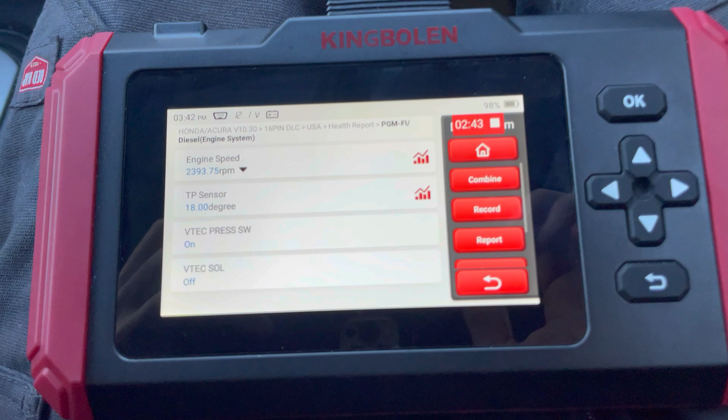We could still use it to diagnose this problem, but we would have to go about it a little differently. We can't use the graphing, and we can't necessarily check the timing of what's happening, but we could just watch the data as it goes. Yeah, see that? VTEC solenoid changed state. It turned on while the pressure switch turned off, let off the throttle a little bit. And they changed. They're opposite of each other. Yep, so we could use this tool to diagnose it in the same way, we just don't have the graphing.

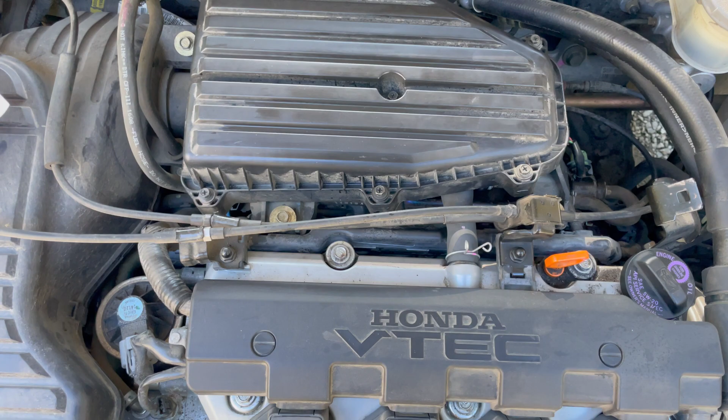So I think that's it for this video. I'm going to pass the information along to the customer, and one more thing. I consulted my peers, and one guy reminded me, he said, hey, check your grounds. And yeah, I did check all 4 ECM grounds, and they are good. I didn't show that. Another thing is, a few guys said, well, can you really trust the scan tool? And the answer to that is, I'm not sure, because I haven't had that scan tool for very long. I haven't used it on very many Hondas.

What I did also do was, from this ECM connector, I plugged in the purge valve and I grounded that wire, and the purge valve does operate, so I can hear it click, click, click every time I ground the wire. So that further confirms that the ECM is not doing what it's supposed to. I commanded the bypass valve and the vent valve on and off with the scanner also, and they did operate, so I think I can trust the scanner. I also took that Topdon and plugged it into a 2000 Honda Odyssey and ran some actuation tests on the EVAP system, and yes, the scan tool does seem to be successfully able to command this Honda.

So in summary, with all the testing, it looks like we've got a faulty ECM, and that's what I'm going to tell the customer. I'm going to tell them you should replace the EVAP purge solenoid and the ECM, just in case there's a bad diode inside that solenoid or something, and that was the reason that it did fail.